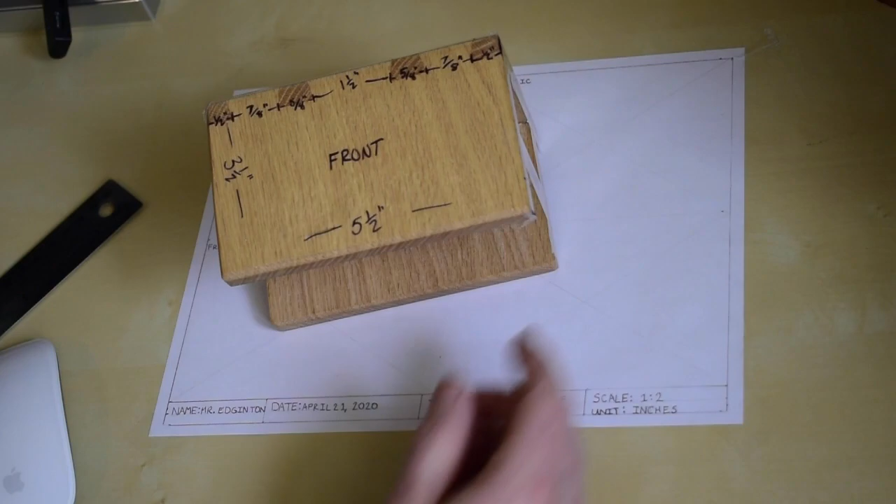So the first thing I'm going to do is, remember I have a scale that I chose, 1 to 2. So every 1 inch equals 2 inches on here.

So this 5.5 inches normally would measure exactly 5.5 inches. But if I drew this full size, it wouldn't fit on the paper when I drew it. So I'm going to actually cut it in half for sizing.

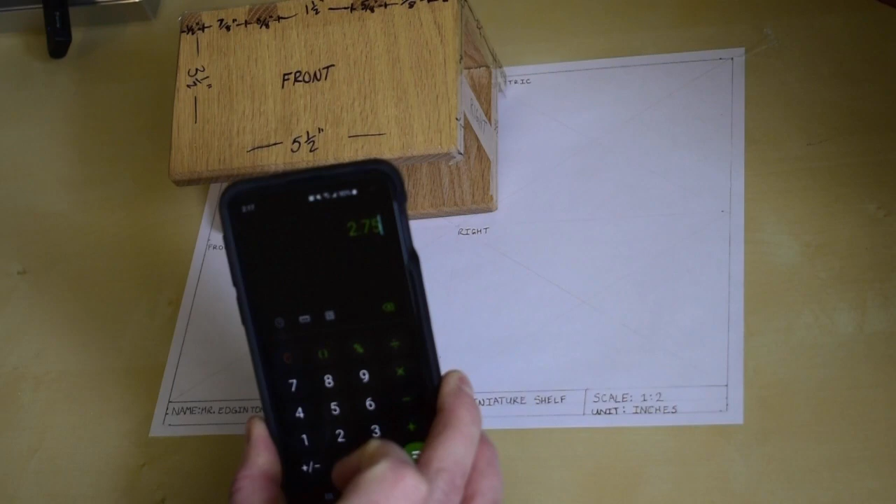So 5.5, you can use a calculator. I'm actually just going to do it for ease of use, and I'm just going to use the calculator on my phone. So what I can do here is take 5.5 divided by 2, and that equals 2.75. So that's 2 3/4. That means the actual size I'm going to draw this is only 2 3/4 wide.

So that's how we're going to get our scale. You can choose any scale you want really, as long as you know how to do it. Again, like I said, if you need to look up how to use scale.

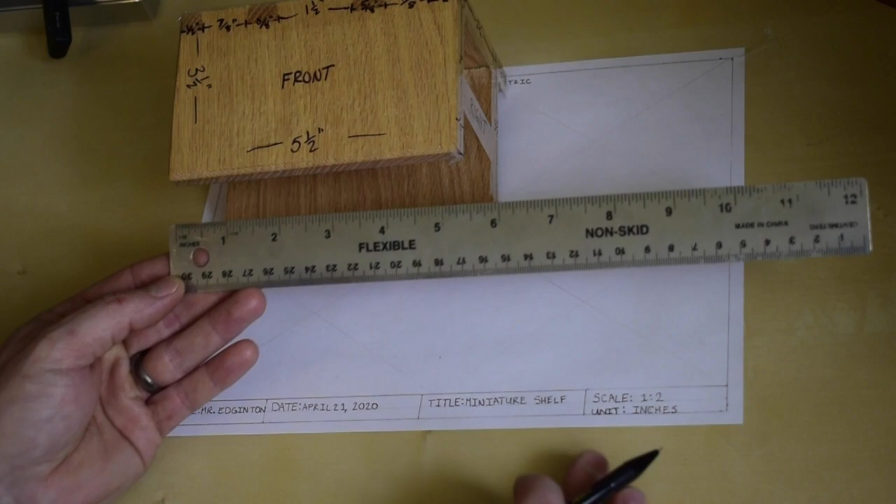Now, what we're going to do here is figure out how big this object's actually going to be. So we have 2 3/4 by, this is 3.5, so if we take 3.5 and divide it by 2, it's 1.5 is half of 3, and 1/4 is half of half. So 1.5 plus 1/4 is 1 3/4. So this shape will actually be 1 3/4 by 2 3/4.

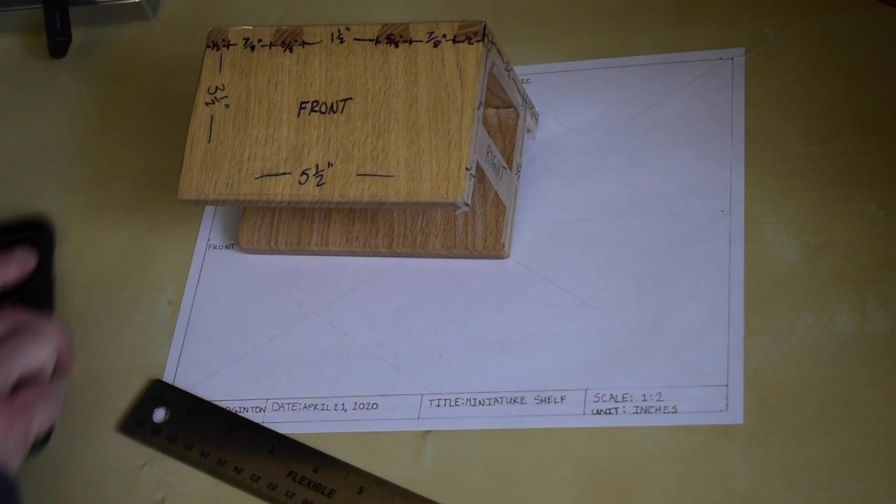So we're going to shrink it quite a bit. Now, I'm going to write that down on another piece of paper so I don't forget. 1 3/4 by 2 3/4. So I just wrote that on a piece of scrap over here, and then I have it to work with.

So that's my front view side. How big is my top going to be? Well, 5.5 and 5.5, that's the same, so that's 2 3/4. But this is 4, right? So that says 4 inches. So I'm going to take 4 divided by 2, and that's 2. So my top is only 2 by 2 3/4. So I'm going to write that down.

And then my right hand side, so my side view, it's going to be the same, 4 inches, because that's how big that is. So 4 inches, which is going to go to 2. So it's 2 wide this time. So side view by 2.

And then my height. So this is a different measurement we haven't looked at yet. So this is 3.5 inches total height. So 3.5 divided by 2 is 1.75. So 1 3/4.

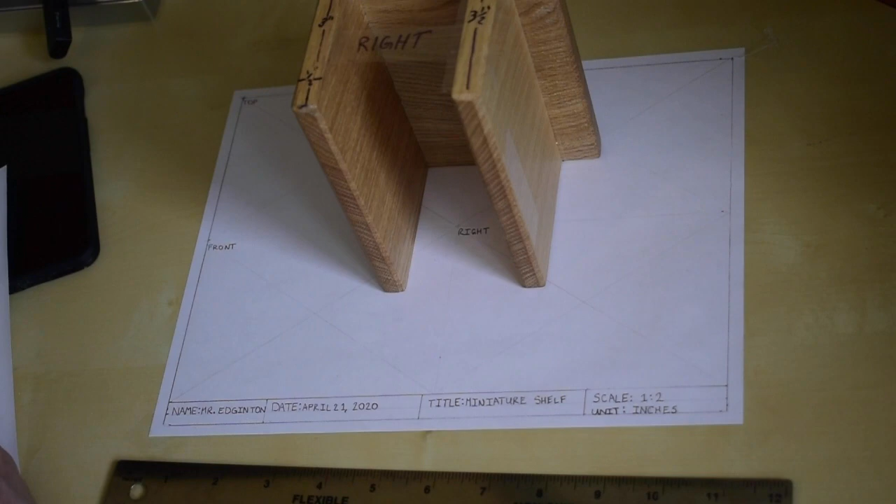So with those numbers, I can actually figure out my placement for my object. I'm actually going to only really be worrying about the first part I draw. So I'm going to choose to draw the top first, okay? Just because it's top in the view of the whole project here. So I'm going to see if I can get this wedged up so you can kind of see what I'm working off of this whole time.

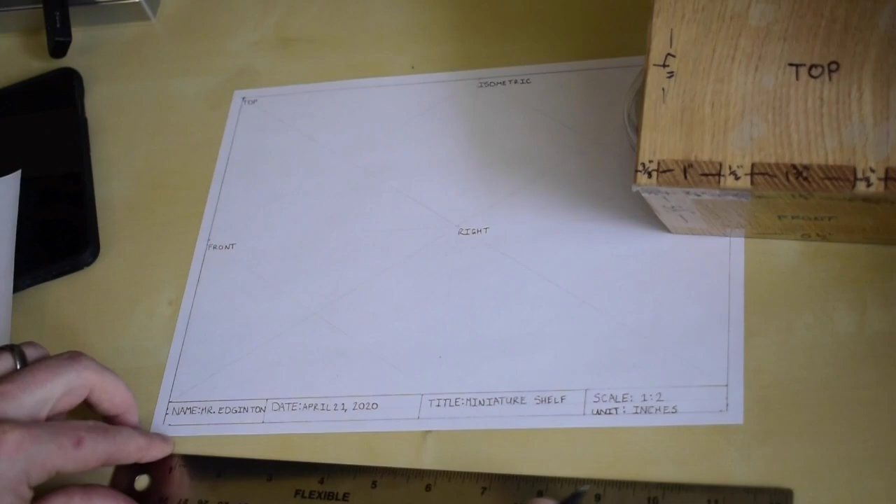So I'm going to be putting this onto the top section of my page. So I'm actually going to use that center point I created. Remember, I have an X from corner to corner in each quadrant of this page. And if this is going to actually be 2 3/4 wide, what I can do to make this a little easier is measure from the center half of 2 3/4 in each direction. Now this is complicated, but it will make your drawing look better.

So I know that this is only going to be 2 inches tall. So I'm actually going to go 1 inch in each direction to simplify that first. So I'm going to set my height by measuring. I have my 1 on the center mark, and I'm going to mark the 0 and then 2. Okay, so that's how tall my image is going to be for the top view.

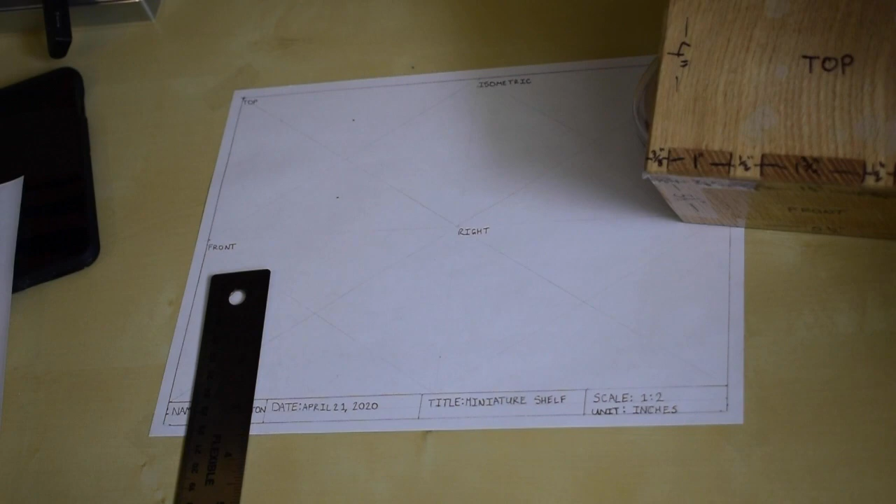Width-wise, 2 3/4. Well, what's half of 2 3/4? It's 1 3/8. So 1 3/8 in each direction. So it doesn't matter what inch you use as long as you know how much you're measuring.

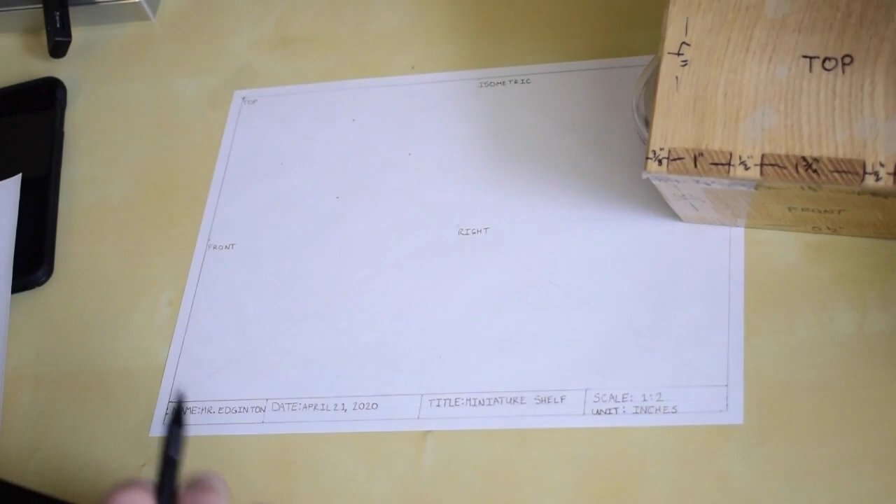So, 1, 1, 2, 3/8. Okay, so now that is how big my top view is going to be.

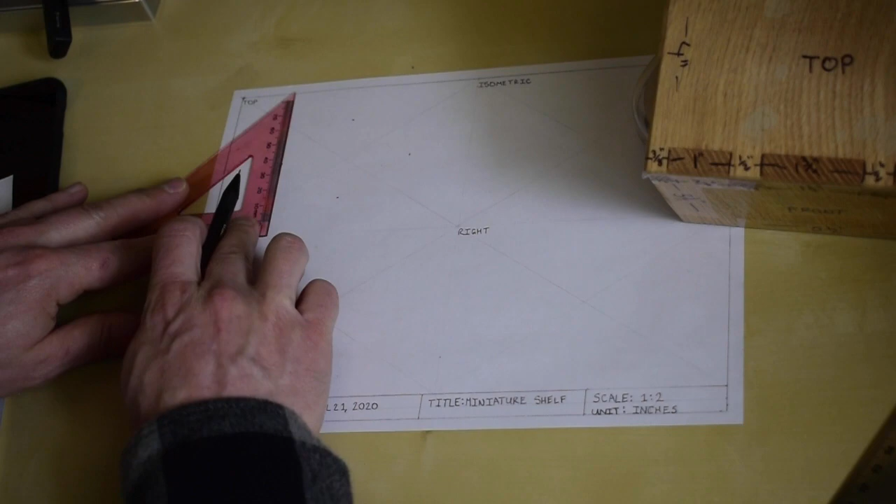Those little dots I'm making are what's going to give me my accurate measurements. Now I can actually use this triangle. I know you probably don't have one, but you can use it if you lay it on the lines you've drawn on your page to use them as a 90-degree angle. So I'm not going to draw dark lines, I'm going to draw very light lines. The reason they're very light is because I'm just getting the location, I'm not actually drawing my object yet. So they're very light lines. I don't even think you could probably see those.

And you can actually use your triangle off of the lines you drew. But what I'm going to do here is just draw them lightly, even though you can't see them. And what I'm going to get you to do is actually make them dark once you're ready to.

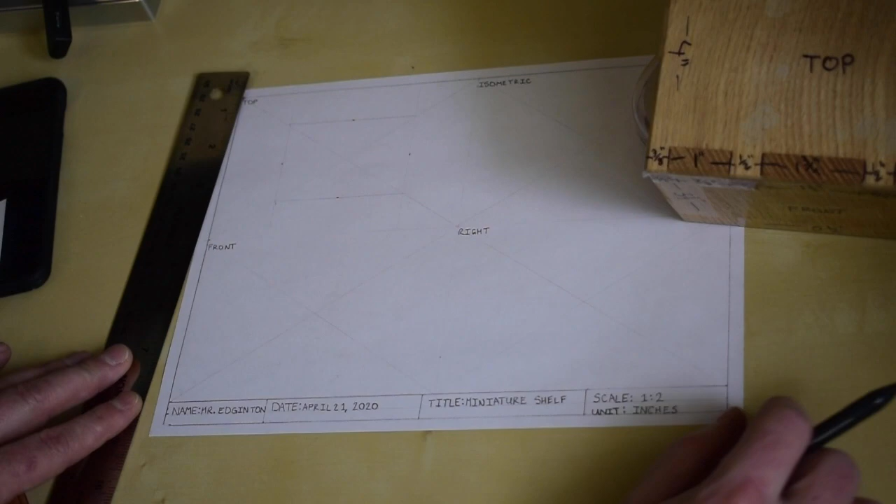So now I have my main dimensions. I can actually go ahead and erase the excess lines that stick off the edges, since I drew my lines longer than I needed. And now I'm going to draw darker lines here because I know that these lines for sure are going to stay on my page.

I'm sorry if my arms are blocking a lot of this. So I've got my two sides. Now I draw the top.

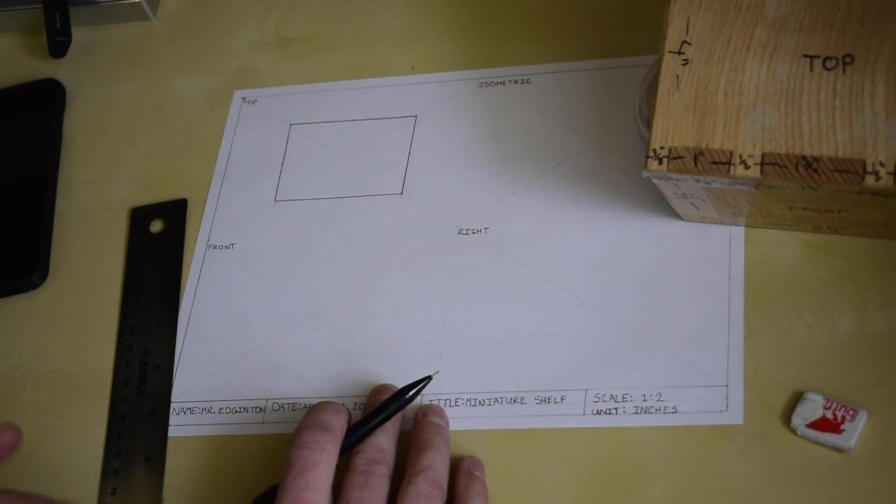And I am going to go into detail on another little topic after we're done drawing the basic shapes, about invisible lines and other things like that. Invisible lines are going to actually help somebody who wants to build the project do something differently. So there's my top view.

I've got the size, I don't have these parts on it yet though. But I know that my top view is a rectangle just with some shapes added to it. So for now, I have a top view.

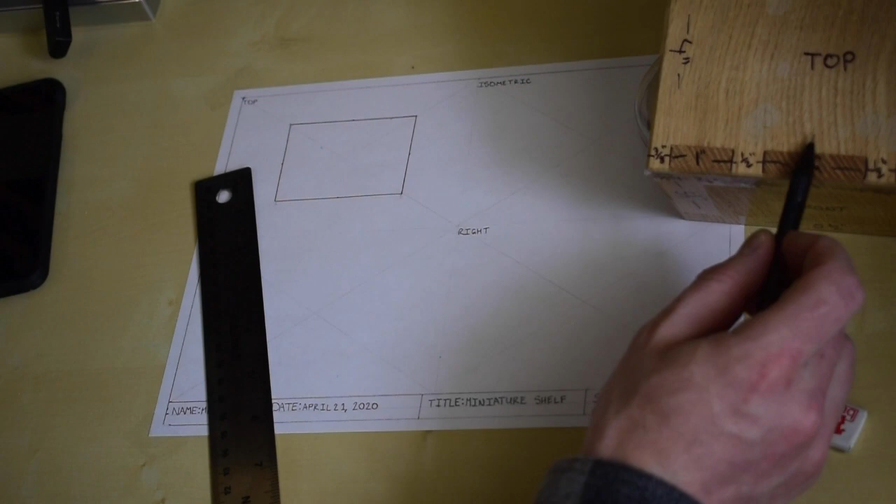Okay, so I'm going to start laying out all these dovetails that you can kind of see here in the video. So the first line needs to be 3/8 from the edge. Now remember, everything on here is the right measurement, I'm going to divide everything by 2 to get it to the right scale. So 3/8 divided by 2 is 3/16.

So I'm going to measure from the edge of my rectangle, 1, 2, 3/16, and just make a little line. Then this is 1 inch, so I'm going to go 1/2 inch from there. And then this is 1/2 inch, I'm going to go 1/4 from there. And this is 1 3/4.

So 1 3/4 is going to be, half of 3/4 is 3/8, and half of 1 is 1/2. But if we turn 1/2 inch into eighths, it's 4/8. So 4/8 plus 3/8 is 7/8. So I'm going to go again from that line and go 7/8 of an inch over.

And then I've got another 1/2 inch space, which is only going to be 1/4. And then I have a 1 inch space, which is going to be 1/2 of an inch. And I'm noticing now my drawing's not that accurate because I don't actually have that proper space. So it's nothing to worry about, but that's the reality.

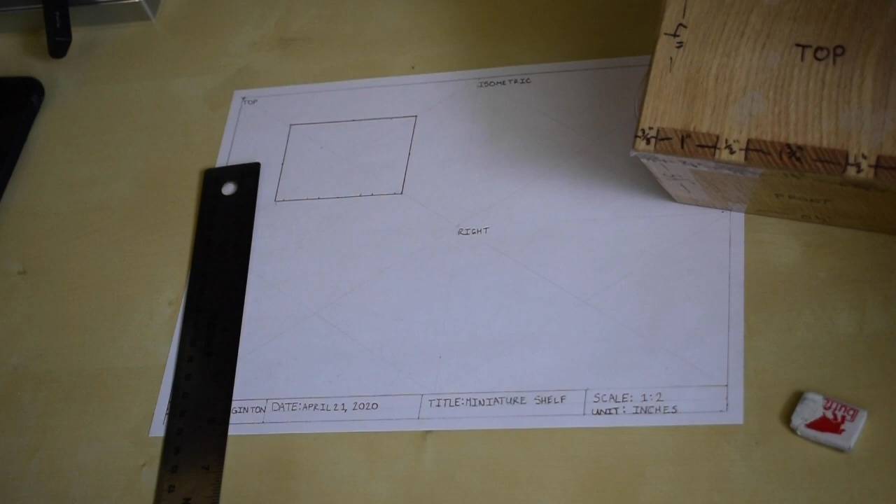Now, I know that the distance from here to here, the difference in material, I know that that's 1/2 of an inch. So I'm going to actually measure 1/4 inch up from my edge on each side here.

Okay, so now I can actually draw a light line connecting that line that's going to be the top of my dovetails, which is what these are. And now I can draw the vertical lines up to that line. Try and make sure you keep your ruler straight so everything looks nice and crisp.

So now I'm actually drawing dark lines vertically, which you can't see yet. They're covered by the ruler still, but you'll see them in a second.

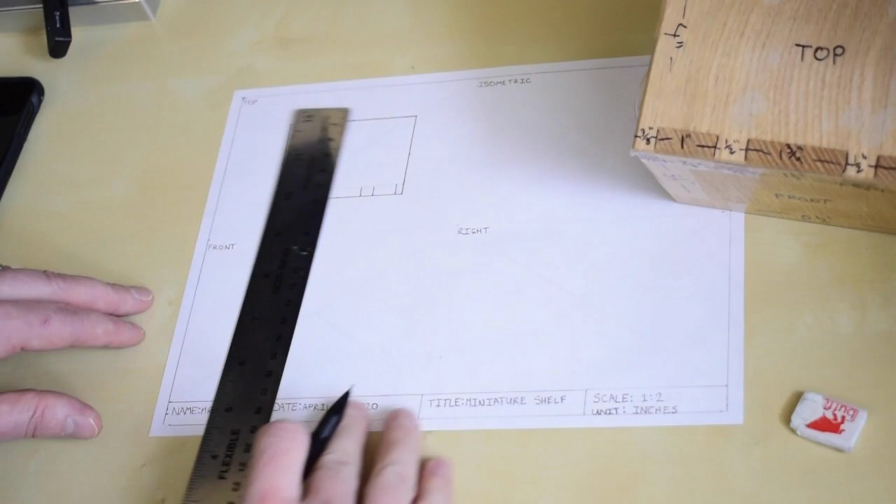So there's my vertical lines. Now I need to actually make the parts that are visible dark. So I'm going to make the parts that would actually be visible.

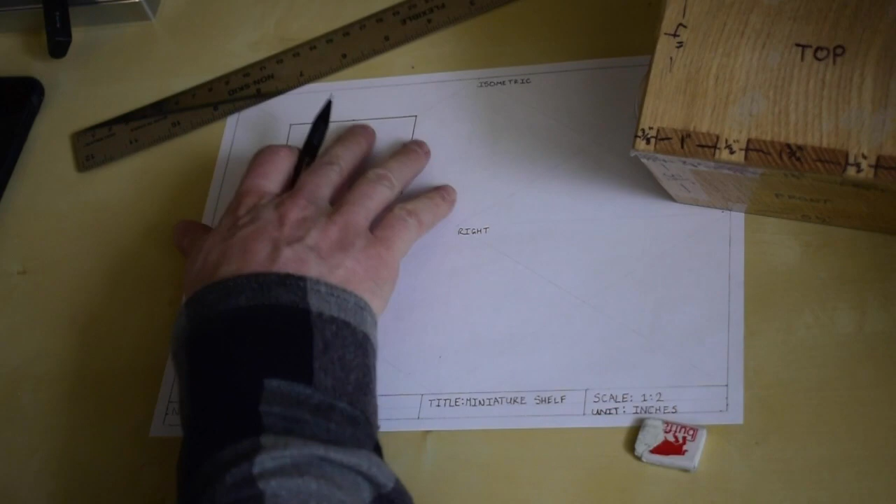Okay, so there's the 3 points. Now I can go in and erase the extra lines that shouldn't be there. Okay, so those are gone. So there's the dovetails from the top view. This is actually done being drawn. We're going to add dimensions and stuff later, but for now this is really good and very visible.

Okay, so the next step we're going to do is we're going to draw the front. So this is our front. We now need to draw this. We're going to transfer that down to the lower part of the page.

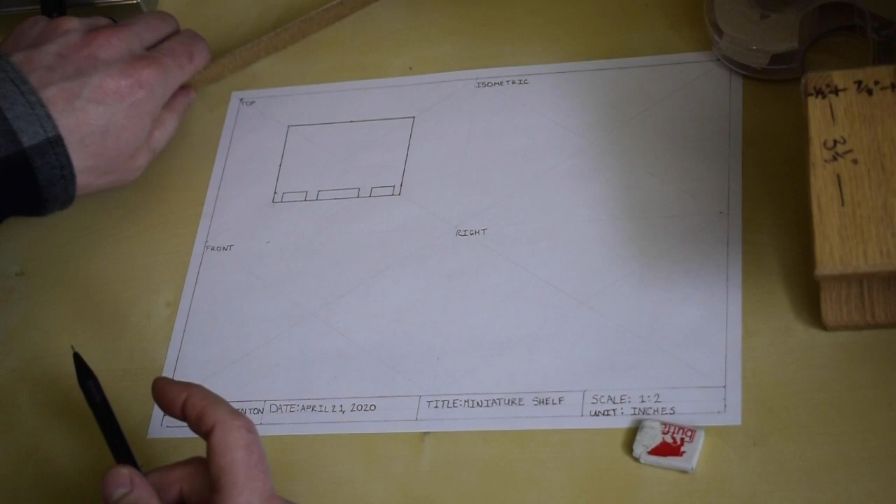So the way I'm going to end up doing this is I am going to use that centering technique I did before, just for the vertical placing, because we already know where it goes sideways. So this object is 3.5 inches tall. We already got that converted before, so that's only 1 3/4 high. Half of 1 3/4 is going to be half of 1, which is half. Half of 3/4 is 3/8. So again, 4/8 plus 3/8 is 7/8.

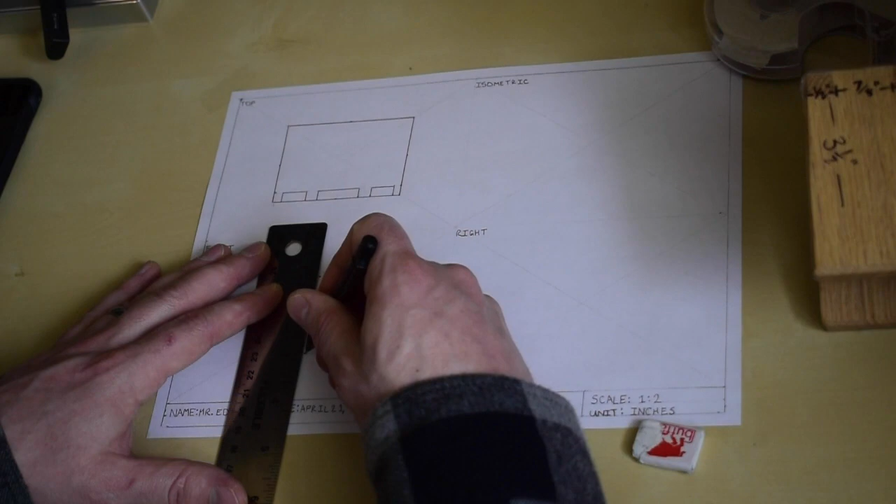So I'm going to go up from the center mark 7/8, and then down 7/8. Okay, and now this is where I have my top and my bottom. But I can actually transfer from my top drawing now. So if you look, I've lined this up nice and accurately here. And now I can come down here and draw a light line just to transfer it down.

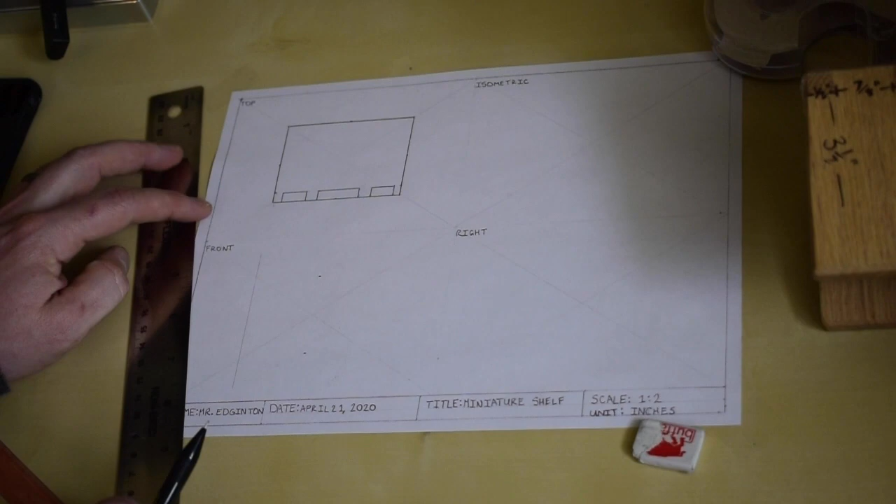And then I'm going to do the same on this side. Pretty much you do this for every line you're going to need in this process. So I'm going to need all of the lines that I actually drew last time. I'm going to transfer them all down very lightly so I can see them, but not so they're hard to erase. And they're big enough that they're for sure going to be useful to me, so they're for sure going to line up where I need them.

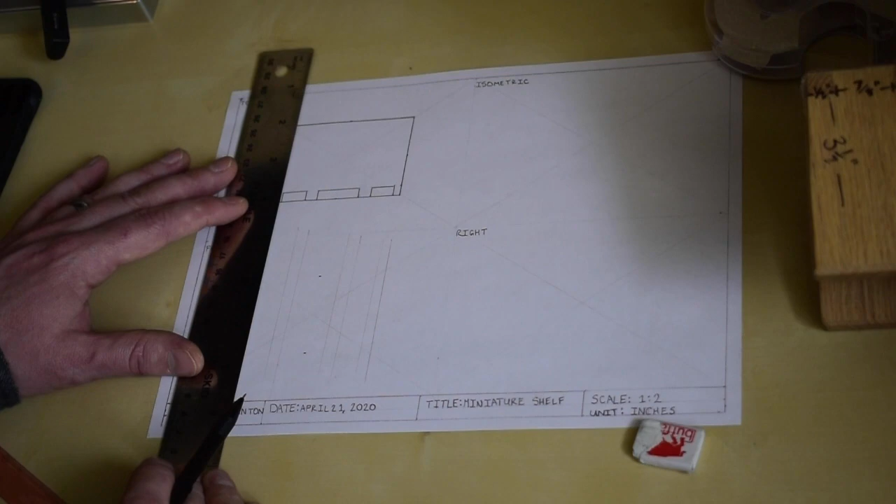So I'm just copying every line on the top drawing down to the bottom drawing. And this is why orthographic drawings are so nice and easy to work with. So I've got my lines. They're not perfectly straight. Hopefully you'll be able to make yours a little more straight. See if you can see those there. So I've got 1, 2, 3, 4, 5, 6, 7, 8 lines. They're not perfect, but they're decent.

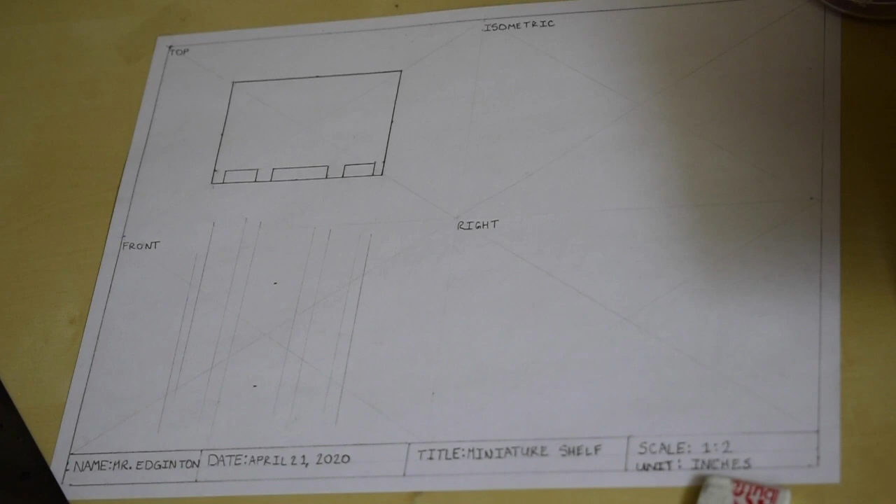Now, what I'm going to do here is I'm going to use a triangle to do this. You can eyeball it, but I'm going to use this line as my guide and line up to the dot that I want to draw a line on. So now I'm going to draw across there. And that I can actually make a dark line now, or I could wait and do it later.

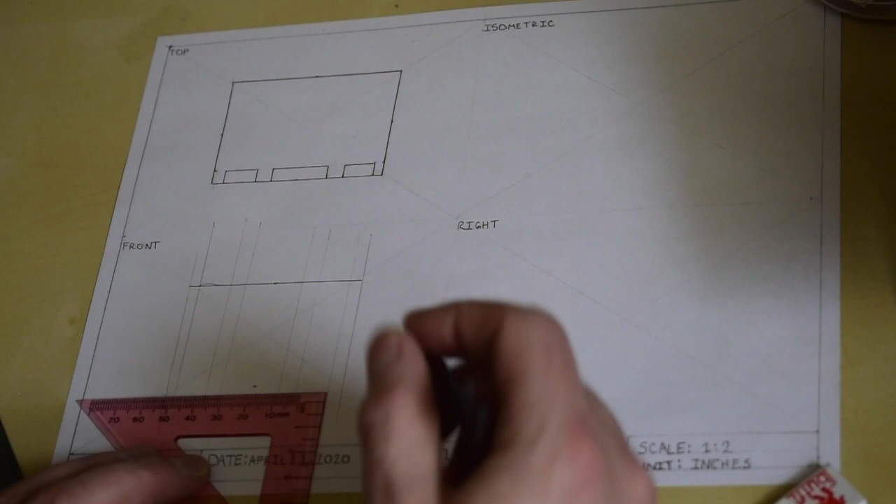And I'm going to do the same at the bottom. So I'm actually going to flip my triangle over so that I can use the same line. Again, dark line all the way over. And now I have those two views. So now I can use just my ruler and connect these lines on the sides because we know that they exist.

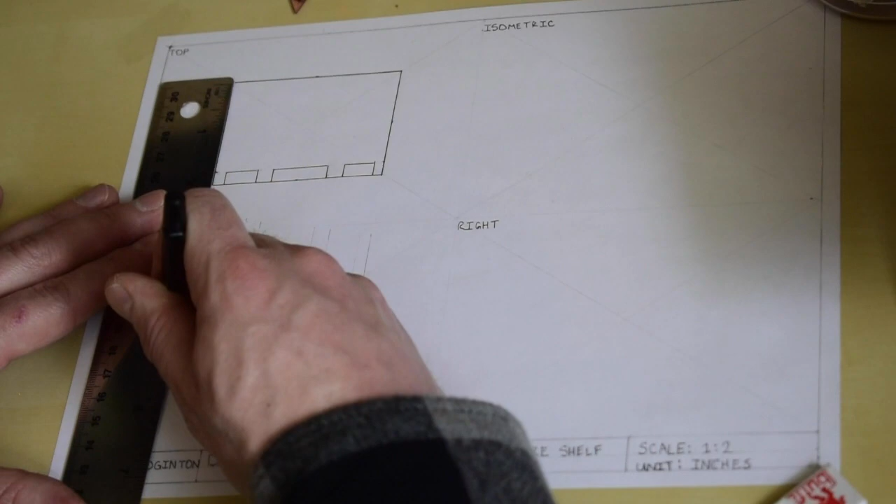And once I have that, I've got this shape on my lower drawing, the outside of that shape. Okay, so I've got that partially in there. Now what I'm going to do is I'm going to pay attention to how far down this goes.

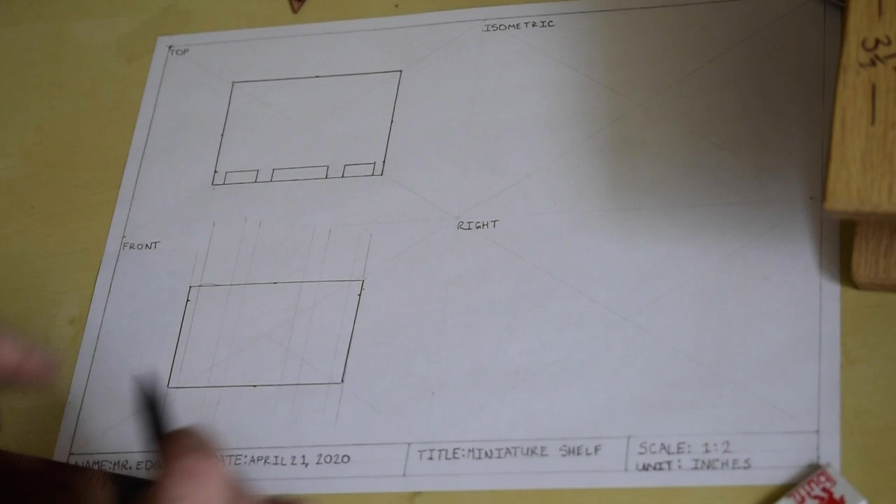That's only 1/2 inch, which we know translates to 1/4 inch when you divide it by 2. So I'm going to mark 1/4 inch. And over here, 1/4 inch. I'm not actually going to draw a light line all the way across because I have my light lines already, so I know where I'm going to draw.

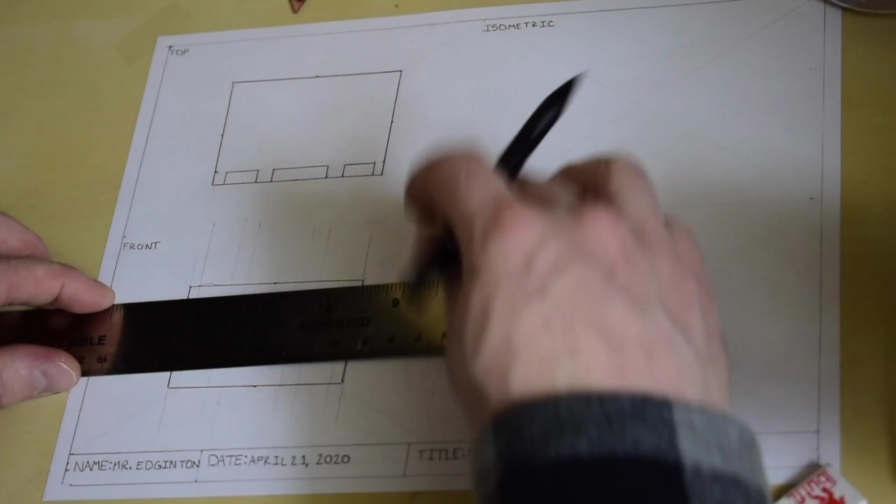And it's going to be in the little areas in between. So we need to see where those little tails are, okay, all the way across. So we're going to go in here and we're going to line up with our 1/4 inch line. And we're going to draw a line in each of those little spaces. These can be dark lines now, okay, just like that.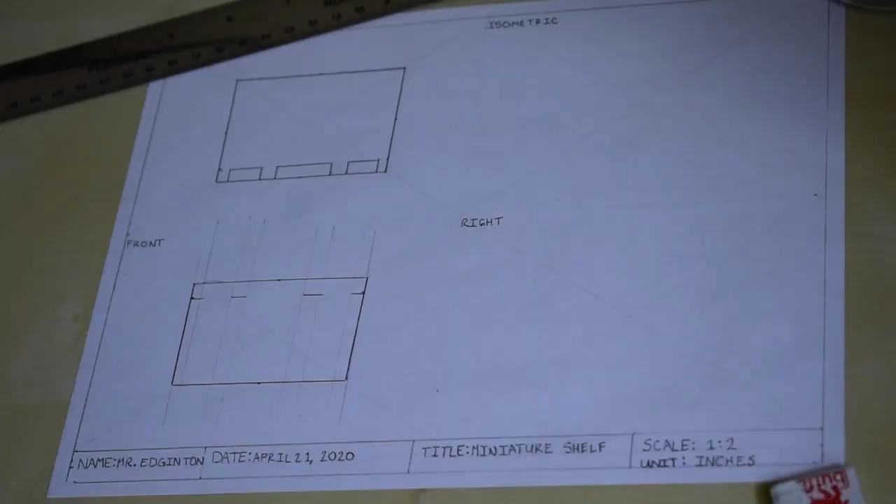Okay, so now we have angles to deal with. So if you actually look closely here, those are on angles. So we're going to just connect the lines to get those angles. So all I have to do is using my ruler, I'm actually going to need some other measurements, but I have these lines at the top, which I'm going to leave.

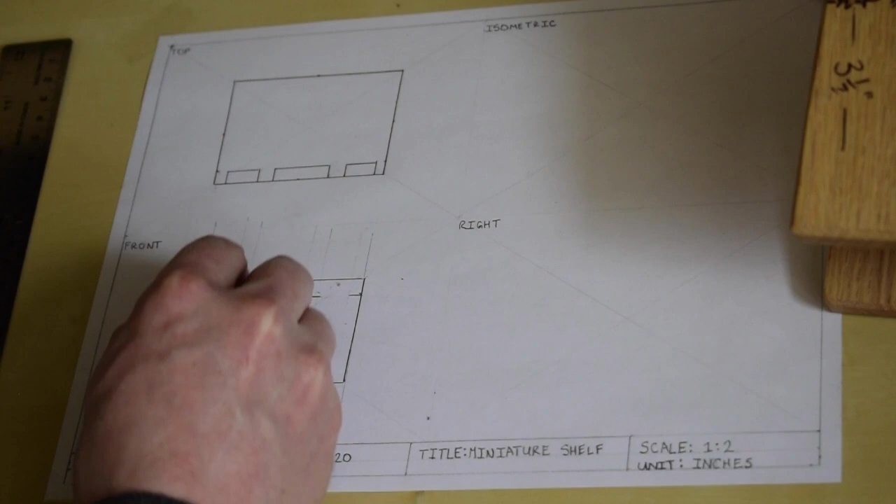And we're going to connect those lines the right way. So I'm erasing all my lines here which are extras, which are all those lines that I drew as guides from the top, which I'm going to leave at the top, but I'm erasing them inside the object.

Now I'm going to use the measurements that are on here and lay them out on this side so I have another marking. My first one is 1/2 inch, so I'm actually going to measure from the side 1/4 inch. Okay, there's my 1/4 inch.

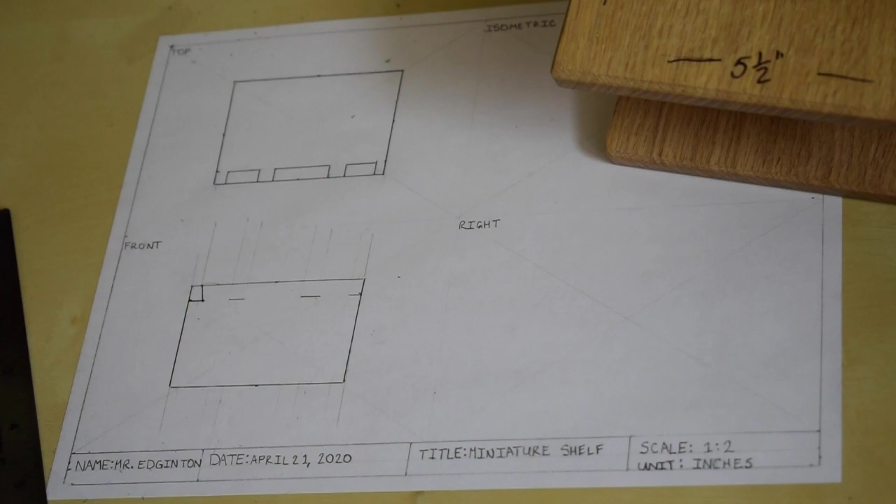And now what I can actually do is, because I know that's a 1/4 and I know this is actually smaller, I can line up with that mark and connect those two lines, just like that. So I'm using these lines that I referenced from up here to connect my line from down here to them to get that angle. So now I know my next space is 7/8 of an inch.

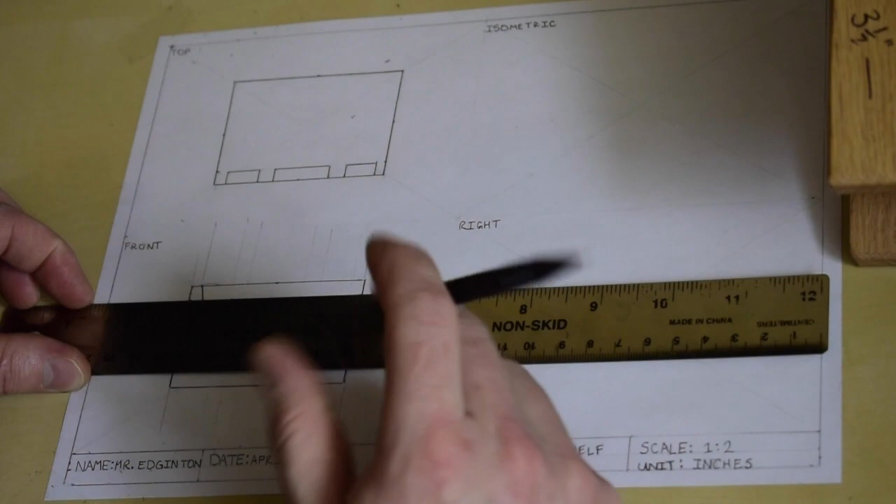So 1/2 of 7/8 is 7/16. So 7/16 is right there. And then that piece is 5/8, which when cut in half is going to be 5/16. So 1, 2, 3, 4, 5/16.

So now I'm actually going to draw that line. Now, this isn't lining up perfectly because I didn't do a great job of transferring my lines. So this is offset from this. So it's actually going to give me a shape more like a straight line on my left hand, angled on my right hand, which isn't what I want.

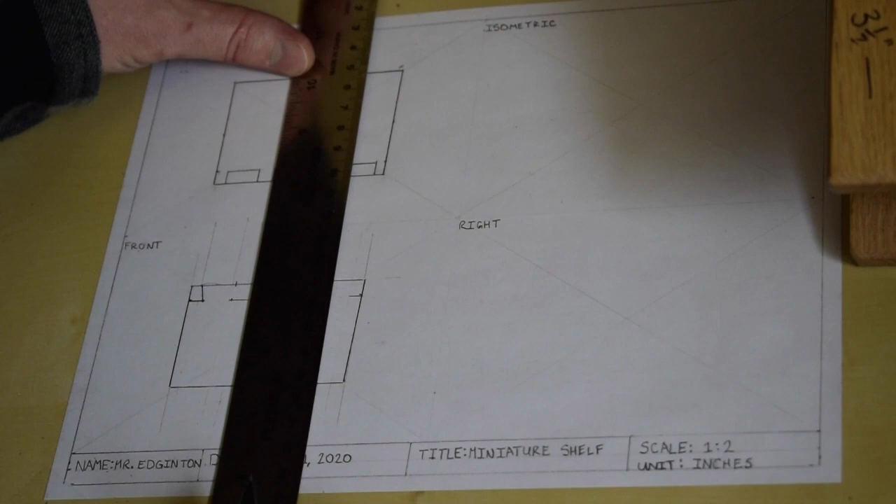So I can just be careful here and see if my lines are just really far off, and they might be. In this case, I think they are. Yes, they are. So I'm just going to make sure that they're more accurate here. And that looks more accurate now.

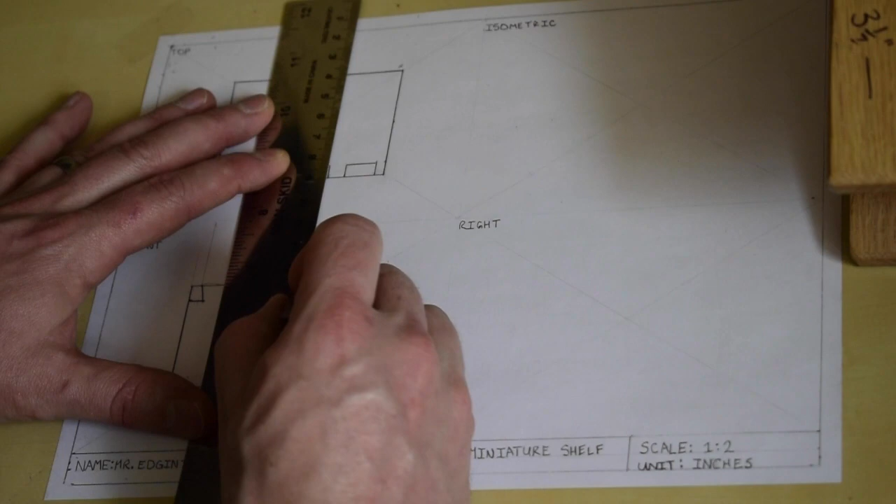So now if I combine those lines, now I'm getting closer to that shape. Now this isn't perfect, like I said, but you just want to do your best to make it look nice. So I'm going to make sure I still have that mark fairly accurate up at the top, because my lines seem to be off a little bit here.

Okay, now I know these are the same, so it's a 1/4 inch in from the side. Okay, and then I connect that. And then that should also be the same, which is going to be 7/16 of an inch in.

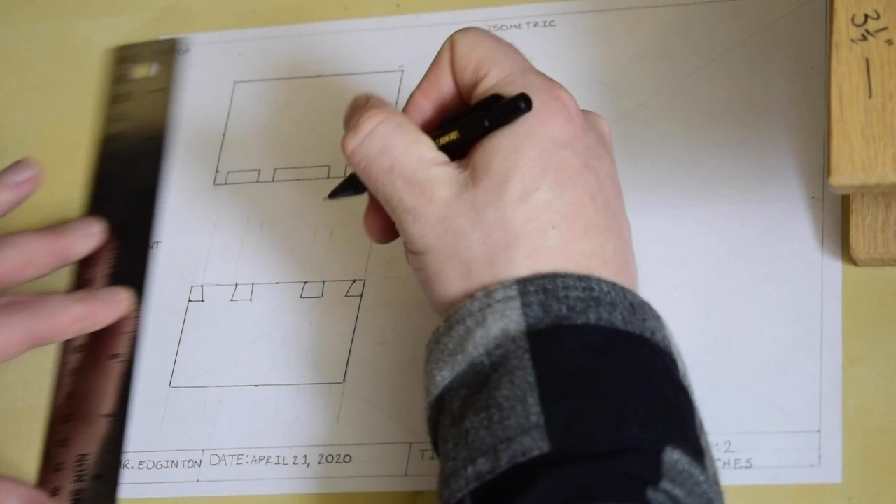Okay, and now I have my parts transferred over. Again, not perfect, but they're fairly in line. So I can actually go ahead and erase all these extra transfer lines that I have up here.

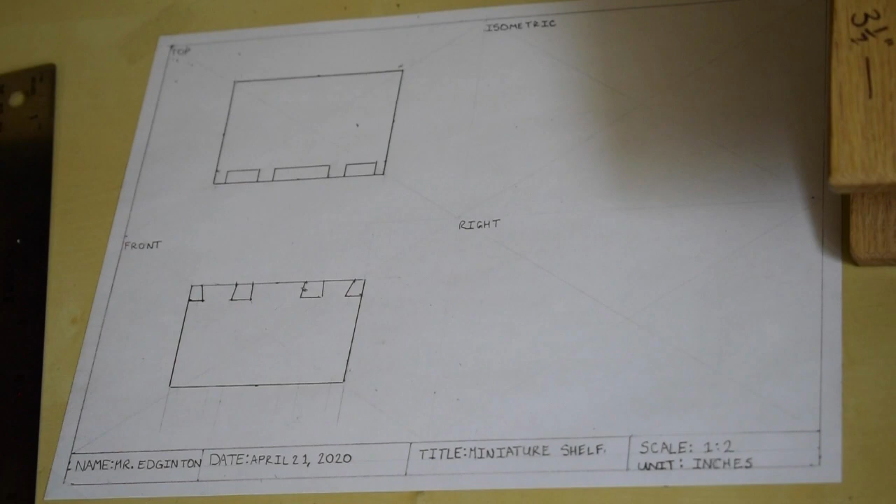When you're done, you're going to erase almost everything on this background except for the top, front, isometric, right, and the actual image. So even the centering points, you're actually going to get rid of those. So I'm going to actually get rid of mine right now, the ones that are in my drawing, because they're just in the way.

And now I just have these blank objects. And they're nice and clearly laid out. I have my top and my front view complete.

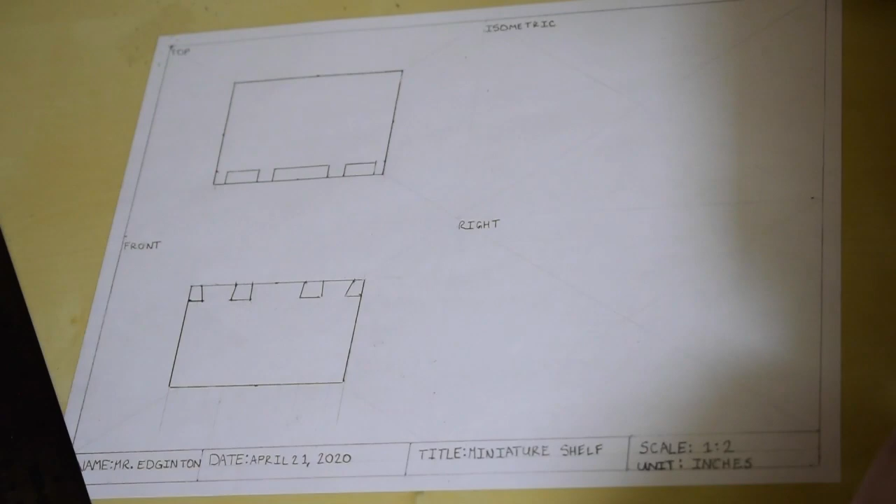Okay, so now I have my top and my front, and now I need to do my side view, which in this case is the right-hand side. So, because we already set these up, we need to know the distance from here to here, because that's how far we go from here to the next drawing. So, the distance we're just going to measure.

So it is 1 7/8. So I'm actually going to measure over 1 7/8, following the same lines. 1 7/8. And at 1 7/8, I'm going to draw a light line just to start my next part of the drawing. So follow the top, 1 7/8, and then draw a line.

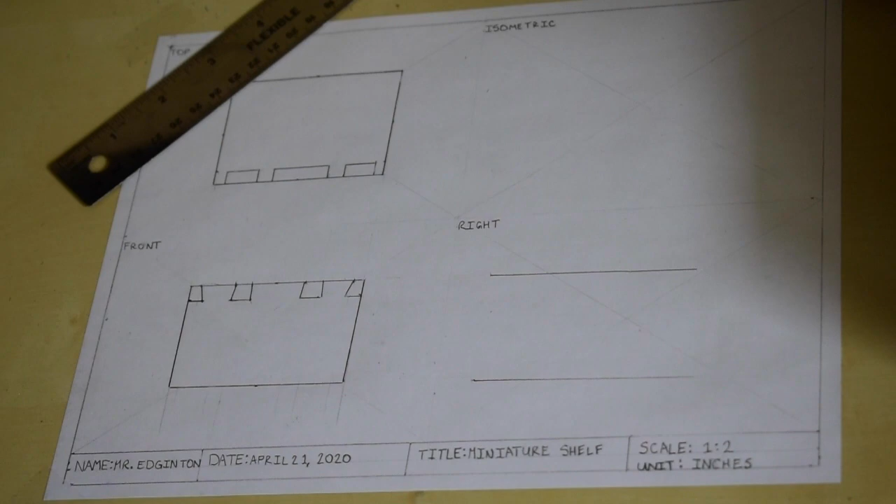Okay, so this distance is the same as this distance. Now that actually allows us to do something pretty cool. It doesn't really work great when you're just at home using this, but you're going to see something.

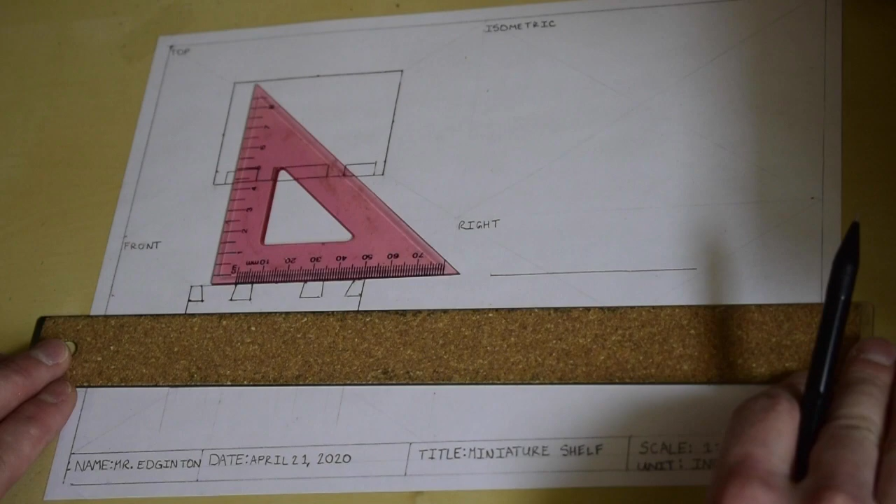If this was on a straight edge, so if I put this at perfect, like parallel to my drawing, and we're allowed to slide this, I could actually take this and line it up with this point, and you're going to see that it should intersect perfectly up here. Now, it's probably not perfect because I drew this just by hand, but it's pretty close.

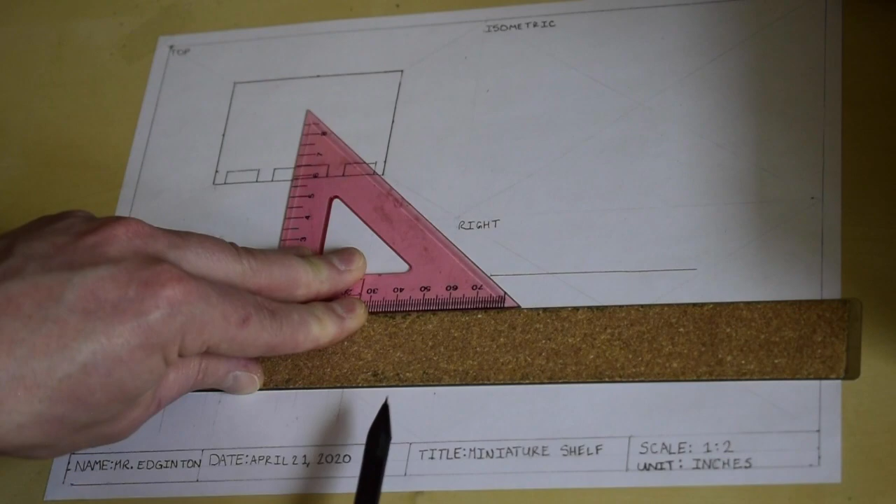So if you look, the end of this line here and this line up perfectly at 45 degrees. So maybe I'll show you this way. You can actually see that if this is straight with your page, that line there lines up with that line there, which means you can actually transfer these dimensions over here using a 45-degree angle.

It's kind of a cool feature of being able to transfer these dimensions over to here. But it's not the end of the world. We're just going to draw it the way we need to.

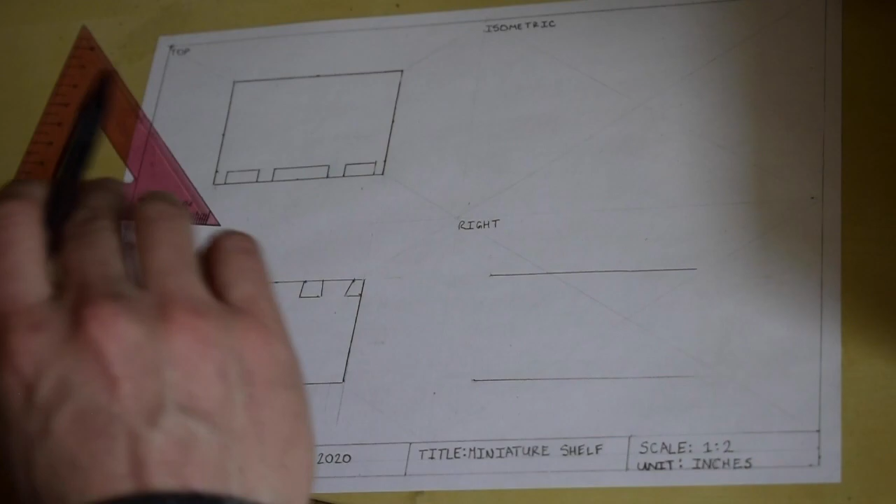So right now we're drawing this, and I have the height set, right? Because this is this drawing. Now we're flipping it this way to see that side. So what we need is we need to know how wide the bottom is and the top.

So the top, we know, because it's the same as on the top, it's 4 inches. So we know that this is going to go 4 inches across, which when we divide by 2 is 2 inches. So get your ruler, measure out 2 inches.

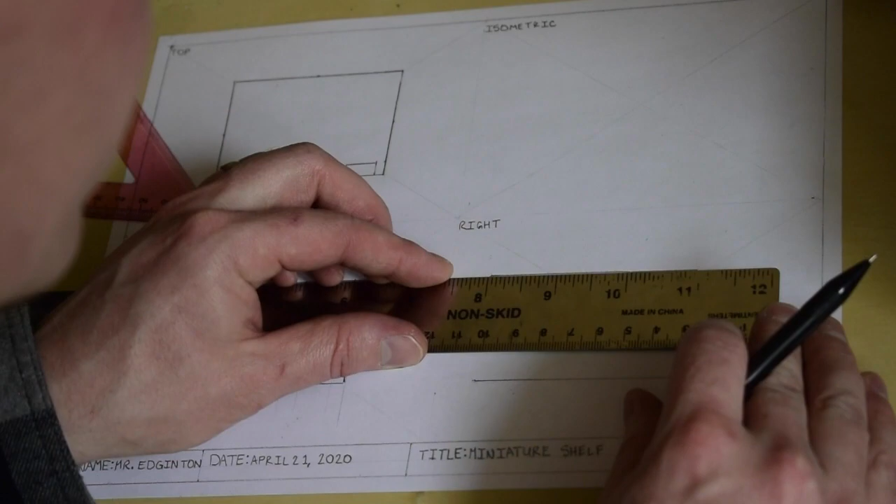So I just made a little mark here to know where that is. I'm going to actually now erase the excess part of my line, so it's gone. And now I have the end of that top line.

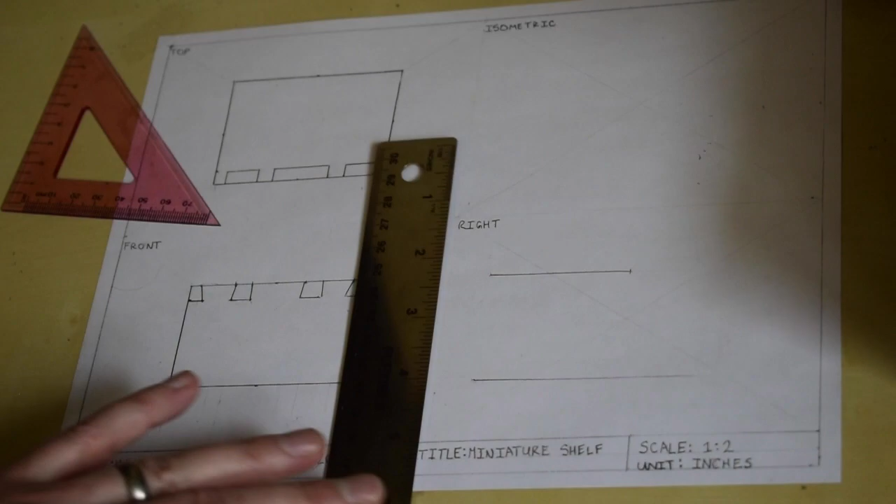So my next step is to figure out how far the gap at the bottom is. Now I can connect this top to my bottom because that's a solid side.

So right now I have drawn already this and this, so this side and this side. Now I need to draw this foot and this foot.

So I know that this is half of an inch from here to here. So I'm going to draw 1/4 of an inch over here.

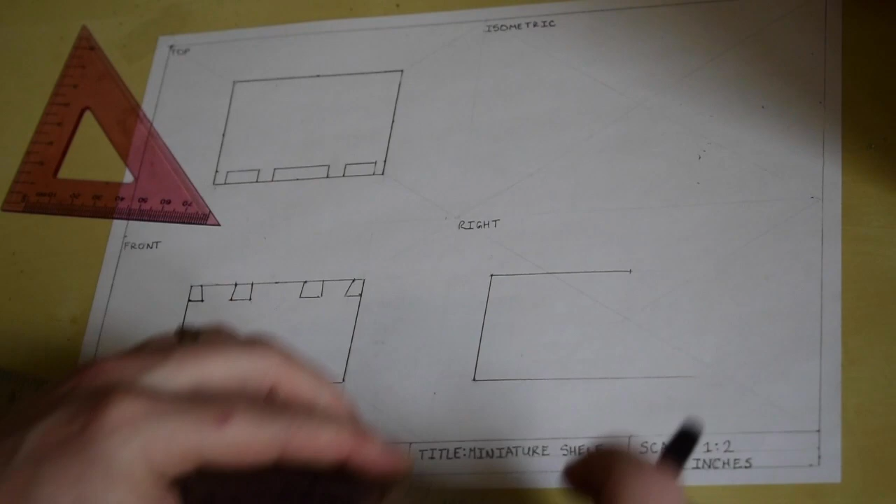Now don't ever forget that you're drawing to scale, because if you forget, something's going to be very weird. Now the distance from here to here I have written, it's 2 1/4. So half of 2 1/4 is 1 1/8.

So I'm going to measure 1 1/8 from there. Use a part of the ruler I can actually read. 1 1/8. And then I know that the other side is also half an inch, which is actually 1/4.

So I don't know if you can see this clearly, but I have a mark here and a mark here and here. Now those lines could go all the way up. I'm going to just carefully mark them closer to the top instead to keep them straighter.

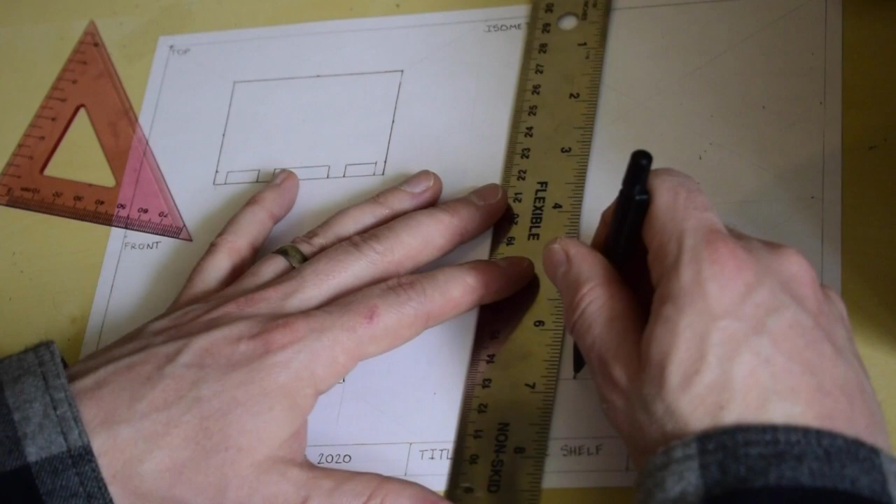So I'm going to mark 1/4 inch, and then I'm going to mark 1 1/8, and I'm going to mark 1/4 inch again. So now I can actually go ahead and lightly draw these lines, connecting those dots I just drew.

Okay, so these are those legs. I know that top to bottom, this thickness is half of an inch as well, so that's also 1/4 inch. So I'm going to mark 1/4 from the top at both ends.

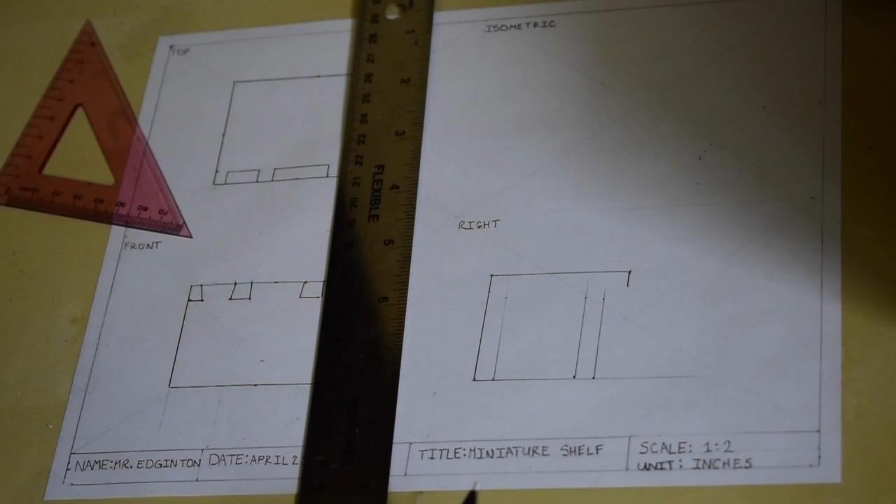Now I drew this line solid because that's the end of the top. Now, try and focus here so you can see.

So I have the measurements, I'll be able to transfer them, but for now, I'm just going to keep drawing. So let's focus back on the drawing.

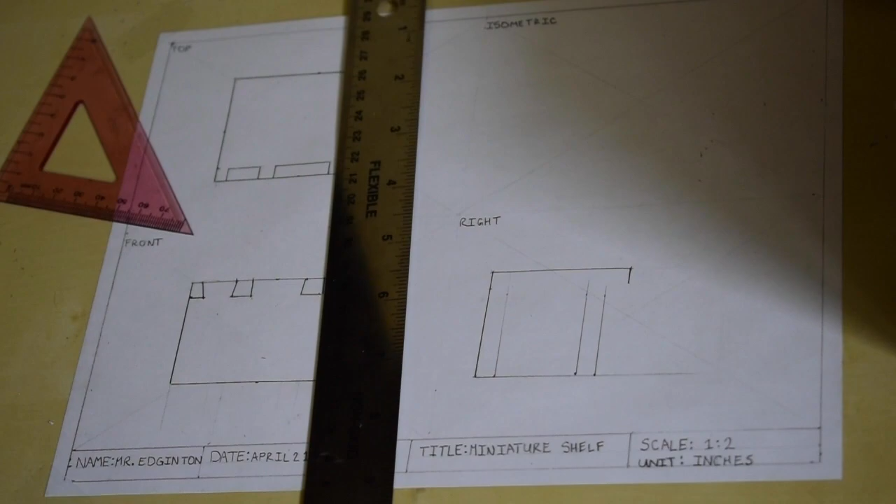Now, I'm going to connect lightly this 1/4 inch line, just like that. Okay, so now I have that line transferred over, and I erased my excess.

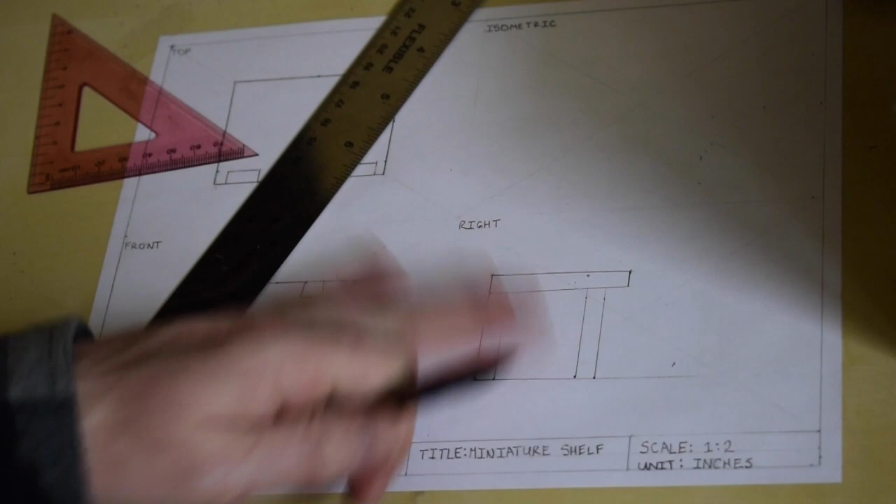Now, this one I know is done. It just goes right to the edge of the block, it's fully complete. I can actually finish this vertical line so it's permanent.

That's good. I can finish these vertical lines up to the top as well because they're also permanent. And I can actually erase this extra bottom line.

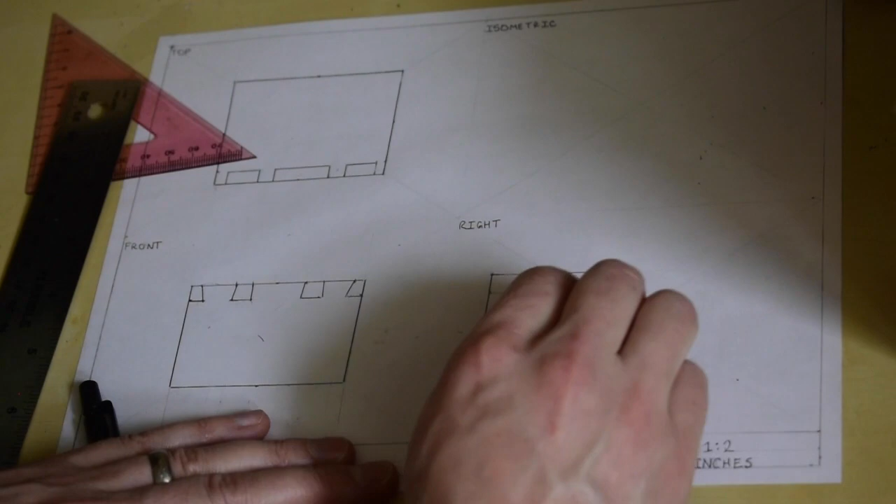Okay, now to draw my dovetail, I need those measurements that I had. I know the bottom of the dovetail goes in 1/16 from this edge. Now that's a very small measurement because 1/16 divided by 2 is 1/32.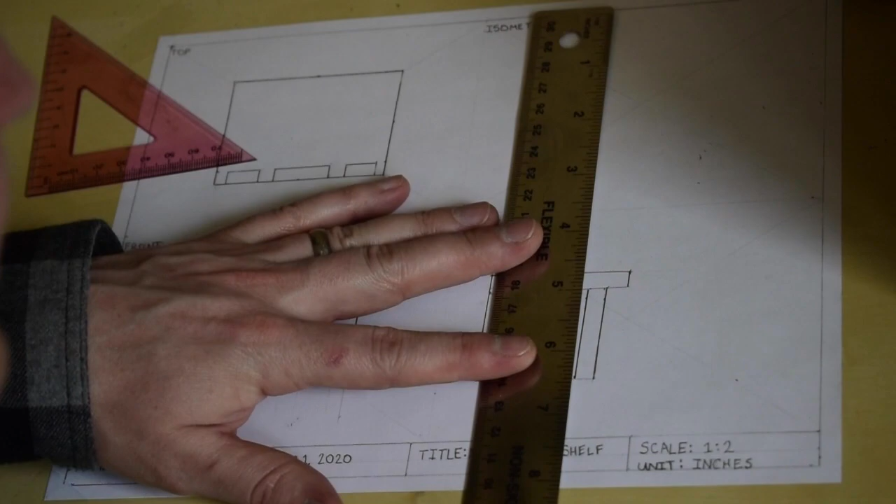This ruler does have 32nds and it's not going to be a very obvious marking. I'm going to warn you, you might not actually see it because it's so small, but that's what I'm going to use. I know the height of my dovetail is 1/4 inch, so I'm only going to go up 1/8 of an inch, on both sides.

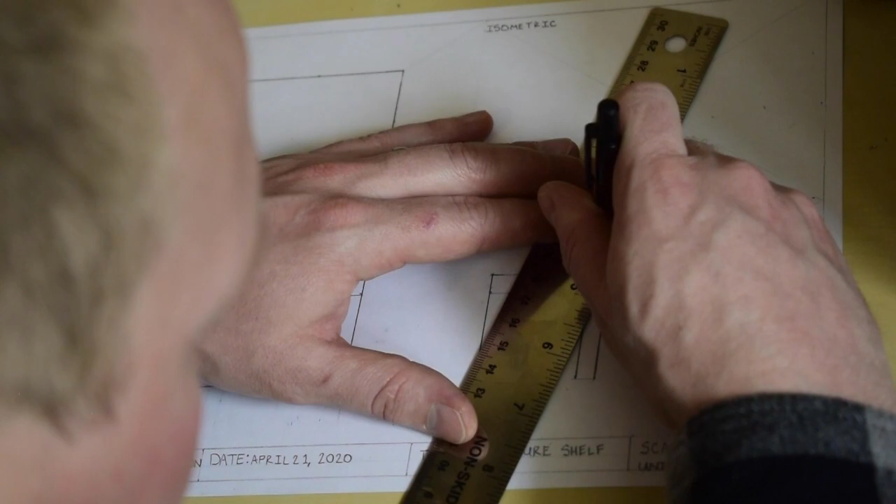Okay, now I can connect my little line that I drew out, 1/32 up to my dot. It's very hard without a proper drafting table when it's this small.

Okay, now I have the shape of my dovetail. I'm going to erase the line that's dividing it so it doesn't look like a broken line anymore, and make sure everything is solid. I'm going to finish this top line, make sure it's nice and dark.

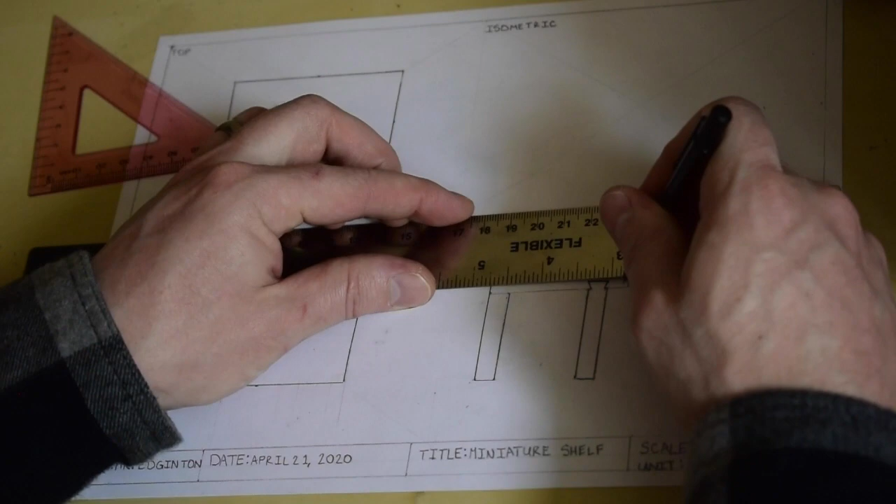Alright, now hopefully you can see that. That's as close as I can get. I'm going to finish the top line because I haven't actually gone over it to make it dark yet. And then there's my side view.

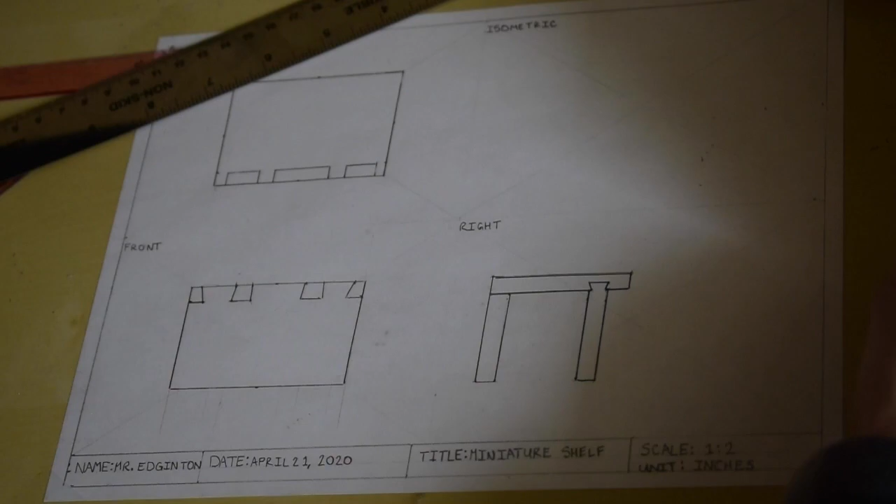Okay, so this is my right side, the front, and then the top view. So they should all look the same as your object.

Now the hidden lines I was talking about is something you're also going to add. A hidden line shows something that's happening that you can't see. So when we're looking at the top view of this object, we know there's a leg back here, but you can't see it in your drawing. It just looks like a flat area. So we need to draw that in, as a hashed line, like a dashed line.

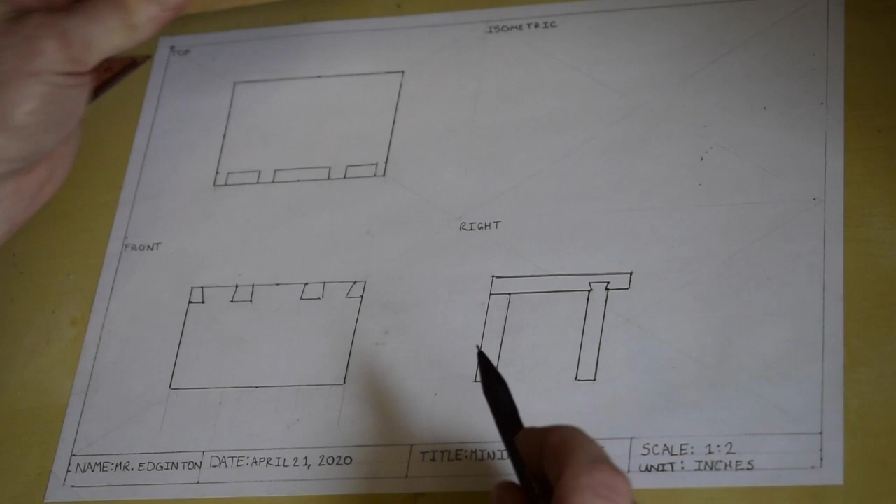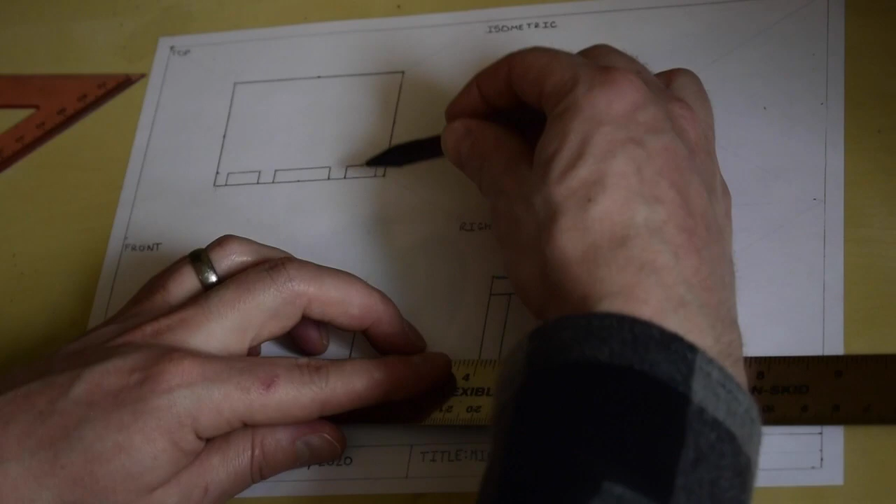So we actually have measurements we can use, the distance from here to here. If you drew it accurately, you should be able to take measurements from it. So 1 3/8 - we can measure from here 1 3/8 to get the distance back. I'm going to measure 1 3/8.

Make a little mark. I know that it's 1/2 inch thick, so I'm going to make a 1/4 inch mark. And I'm going to do it again on the other side. So 1 3/8 and 1/4 inch.

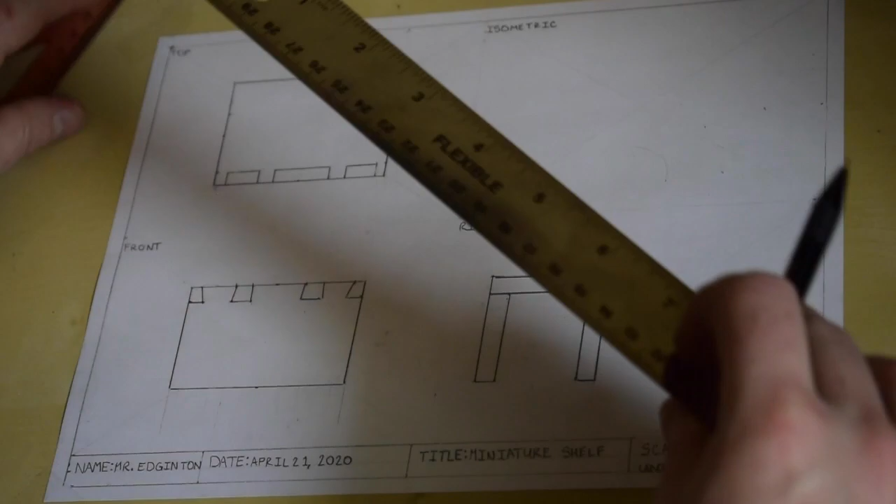Okay, I made my 2 little marks, and now nice and simple, I line up my ruler, and all you do is just draw a dashed line carefully. Try and keep it somewhat consistent so it looks nice, and there's one dashed line.

And then I'll draw the other dashed line to show the thickness of the part. Try and make your dashed lines look the same. And there you go - so there's a hidden part. Hopefully you can see that right here.

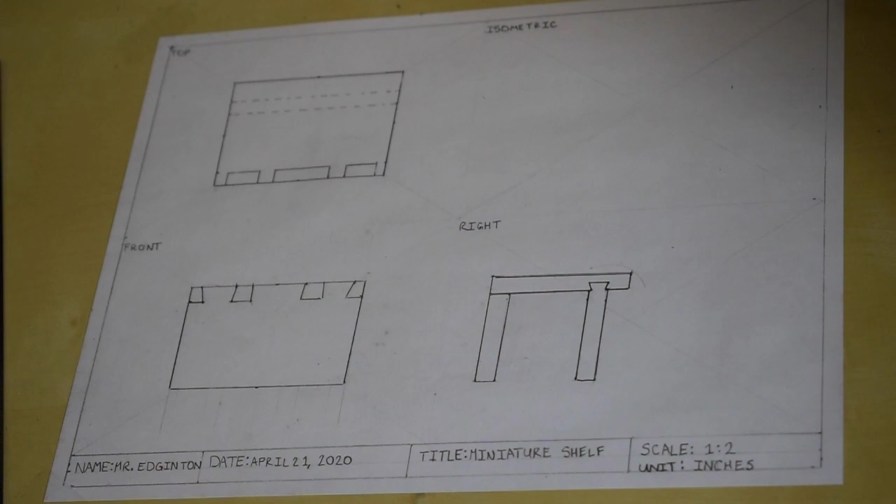That's our hidden geometry, so that's the only part we're missing - being able to see that leg on the top view. On the front view, there really is no hidden geometry to see, other than technically on the other side of this piece, the thickness of this. So that one's easy. We actually have the same thing here that I forgot.

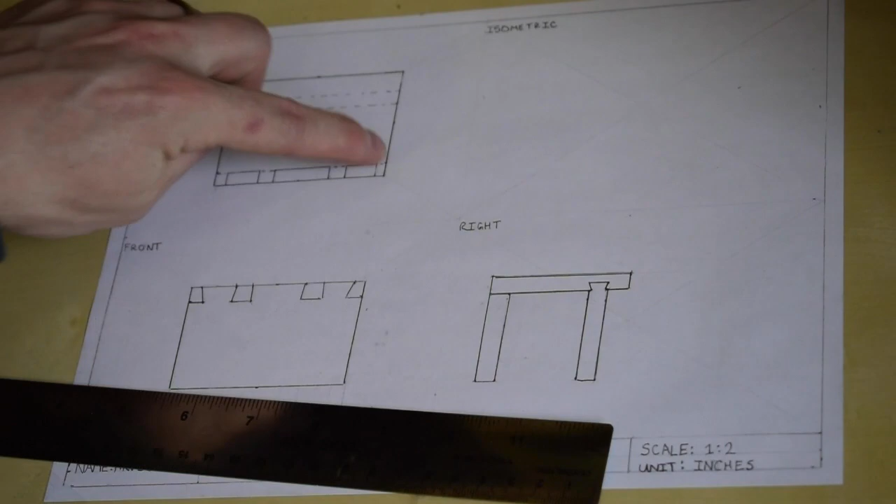You would actually line that ruler up and draw dashed lines there too, trying to make sure not to touch the actual lines. So there's a dashed line between there, and then we draw a dashed line here.

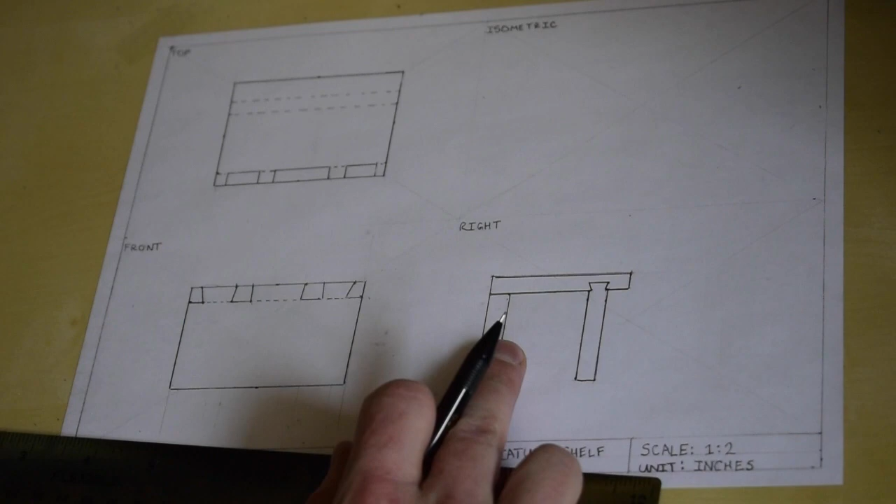That's showing the hidden geometry on the other side of that line. On this one, there is actually hidden geometry to see, which would be the dovetails that go all the way through to the top. So you need to use this line and draw a dashed line there as well, showing that this piece intersects with that piece.

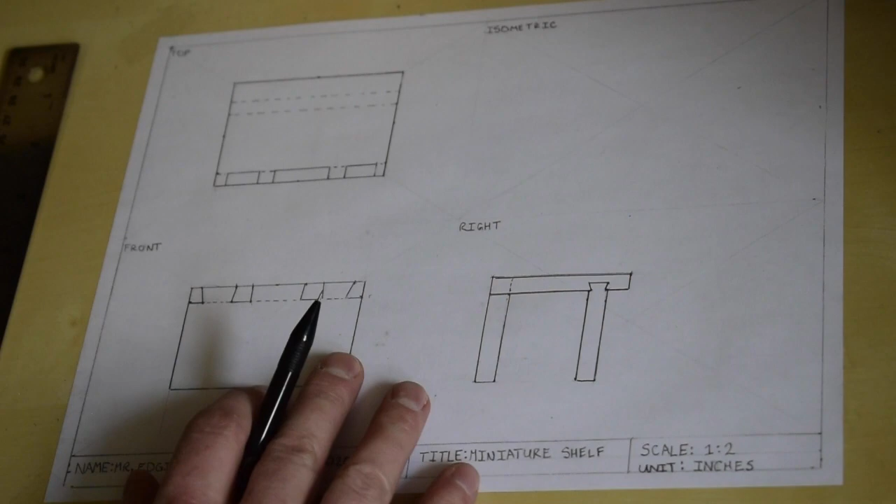Now I'm not too worried if you get your hidden geometry perfect. I'm more worried that you get your orthographic layout more accurate. So this is your biggest goal - to get an object onto paper accurately, and you should be able to take measurements from it once you scale it to the right size.

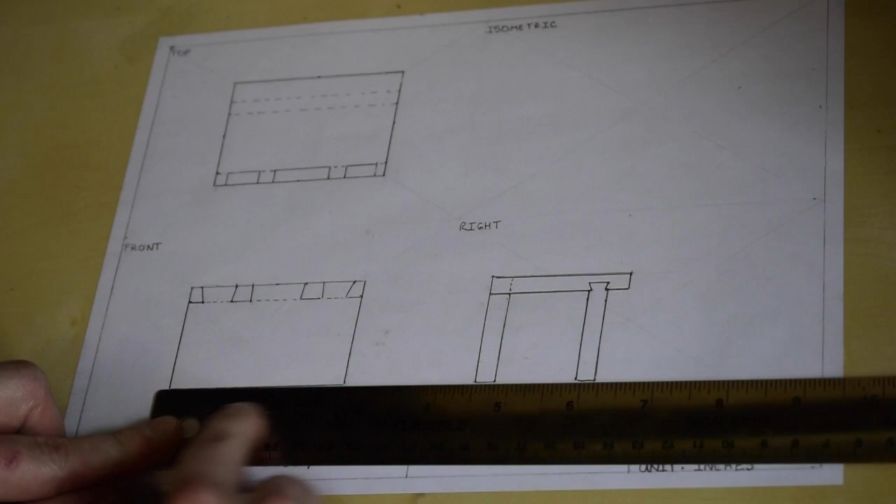So I can actually now take this, measure the width, and if I multiply it by 2, my scale, I'll get the actual size in real life. So I could use these drawings to actually go and build the object. Now we're also going to add dimensions to this in another step.